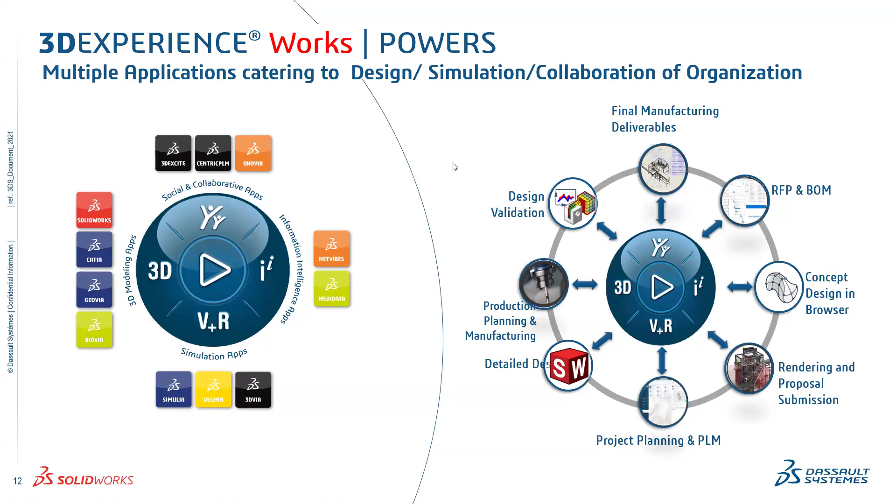So for all these, we have a single platform wherein we have all these solutions on a single unified platform. So over to Divakar to give you more details on our solutions.

Yeah. Thank you, Arun. Mute, please. Yeah. Thank you, Arun, for the wonderful introduction.

So, to take the journey forward, I would like to reiterate a couple of challenges which Arun has specified, right? When we are working, probably these are a couple of challenges in your current work environment. I am sure that you can correlate easily with a couple of them, if not all. Let's say when you started your design journey in your company, the designs were different. And today, with the demand, modular design is something which your customers may be asking for, or product complexity might have gone very high.

Data security, it's one of the areas where everybody is looking. I have the complete data. I have my own property of this data. So how do I manage this data? Then, as Arun highlighted, information is in silos. The design team knows what's happening, but how about the management? How about the marketing? Are they aware what is happening inside the company, what is happening in the design team and so on?

And with COVID in place, we saw that every customer was looking for team mobility. Can I work from home, work from a different plant as such? Then coming to digital communication, even today I would say many of our confidential data we are sharing through WhatsApp or something. Is there any better way of organized digital communication? Then data management, of course we will talk about how SolidWorks is going to help you.

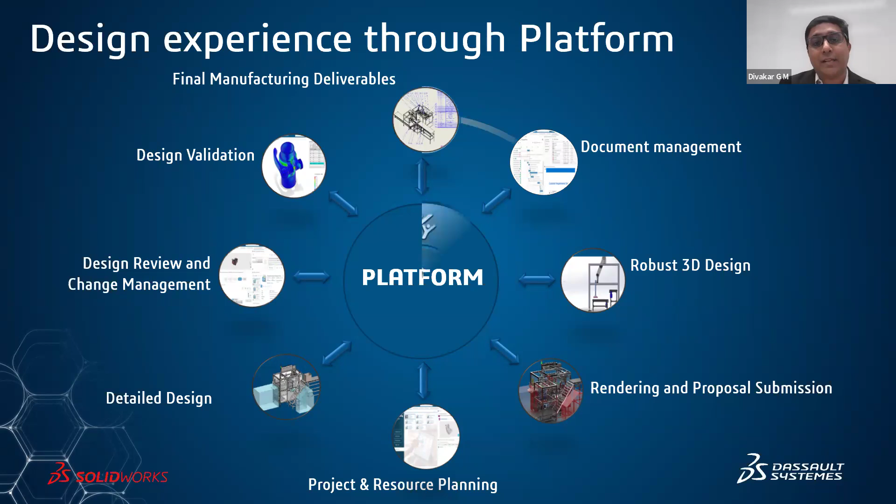In a similar fashion, since the technology has improved, can we have a platform even for this design organization? And yes, that's what we are going to showcase today, which is nothing but our 3D Experience platform. So what we are going to take you through in the next 25-30 minutes, what I'm going to showcase in my demonstration is, when you look at 3D Experience SolidWorks, the latest SolidWorks per se, the design and engineering portion is definitely taken care of.

You already know that SolidWorks is well known for its robust 3D CAD modeling system. Along with that, the governance or data management portion is inbuilt. Then anything on simulation is also there in the same platform. So basically what we are going to showcase today are connected products in a unified platform, which will definitely result in a collaborative work environment.

How is this possible? When we say the latest SolidWorks, which is 3D Experience SolidWorks, of course the design tool SolidWorks is there. On top of it, when you procure SolidWorks or upgrade your existing SolidWorks to the latest SolidWorks, the data and task management is inbuilt. You heard it right. You are not going to procure one more software to manage your data. Instead, in SolidWorks itself, you will be able to manage your data, whether it's revision management, version management, or task management. It is already inbuilt within the SolidWorks interface. In the next couple of minutes, you will see a demonstration on that as well.

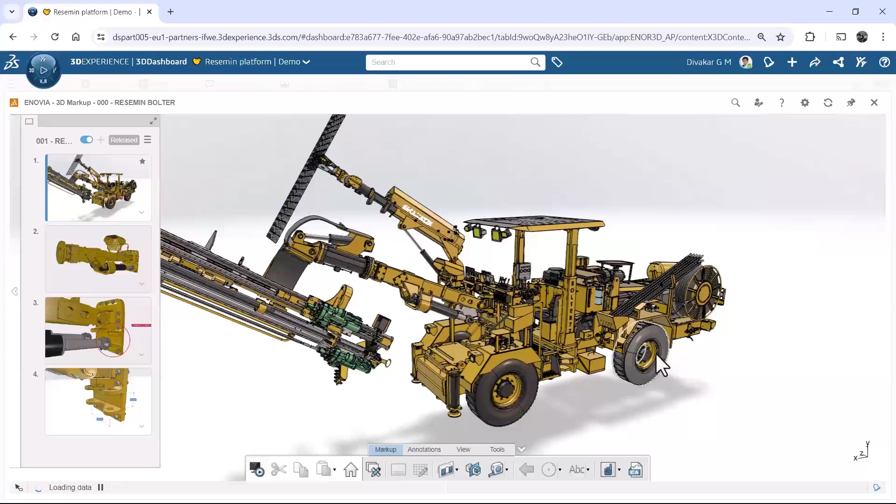Now, the design head opens the task and he sees that instead of going by emails or text, he can literally go by these kinds of markups, which can be created even by a sales leader, a marketing team, or the service guy as well. So he understands that, yes, this is the machine I'm supposed to work on. In this subassembly there is a requirement; for example, in this case, I'm planning to do a design of a knucklehead assembly. So how this needs to be done was communicated pictorially to the design head.

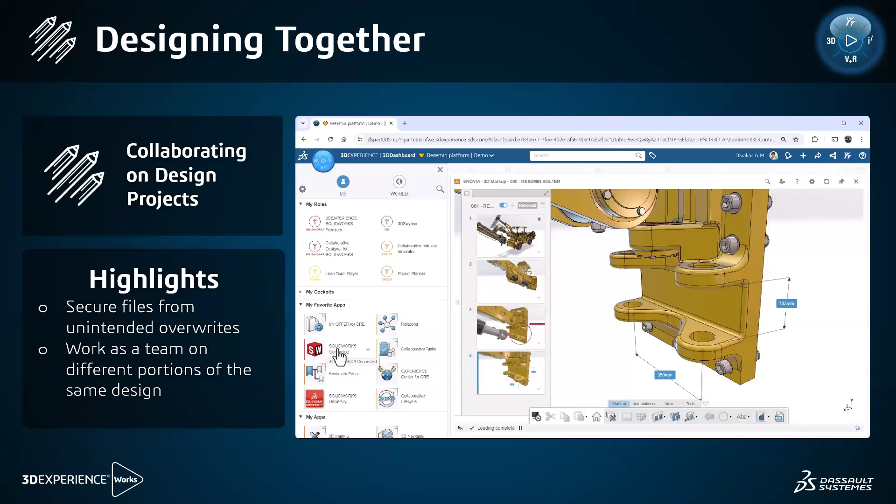Now, coming to the design head, let's see how he can start his journey. First, he will just log in. He will launch SolidWorks from the platform. He knows this is the assembly and the details, so he will open up the assembly. Yes, this is where the assembly needs to be done. The first thing he'll do is start creating a part. For example, this is the knuckle part. I'm not getting into how this can be created. So he has already created the part.

Now you will see how SolidWorks will help you. The data management is already coming into the picture. As you can see on the right pane, with a click of a button, I'm entering into the platform area, that too within the SolidWorks interface itself. So when I save this component, you see that earlier it was empty. Now you have all the relevant areas like revision, maturity state, all that information automatically generated.

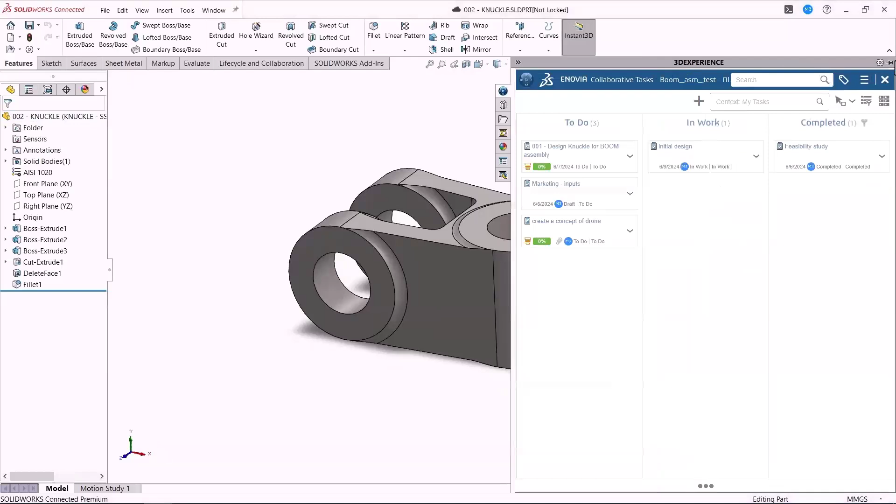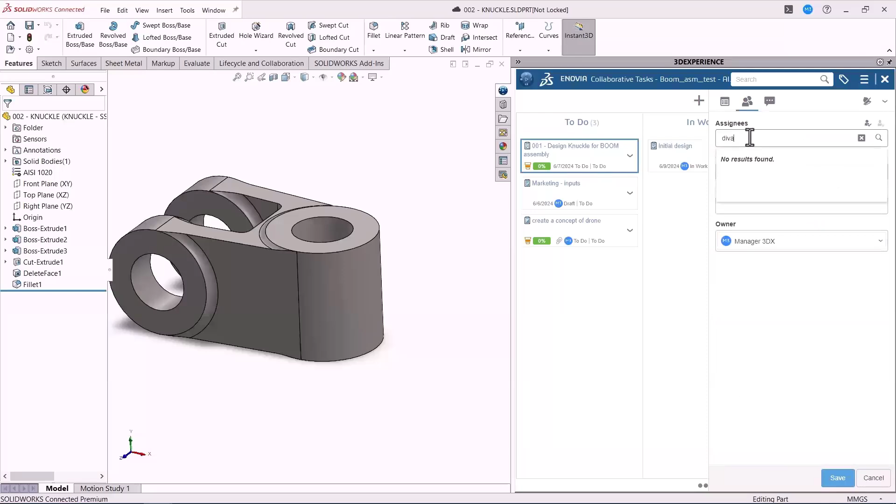Now, as a next step, I have created this component. Now I want to push this to my design engineer, asking him to build a complete assembly out of this knucklehead, which will be fitted into that particular boom assembly. Instead of telling my engineer to go to this folder and pick up these components, I've started creating a task, and in the task itself I have added the links to those components. Then finally, I'll assign this to my engineer, stating this is the component you're supposed to work on, this is the assembly you're supposed to work on, and so on.

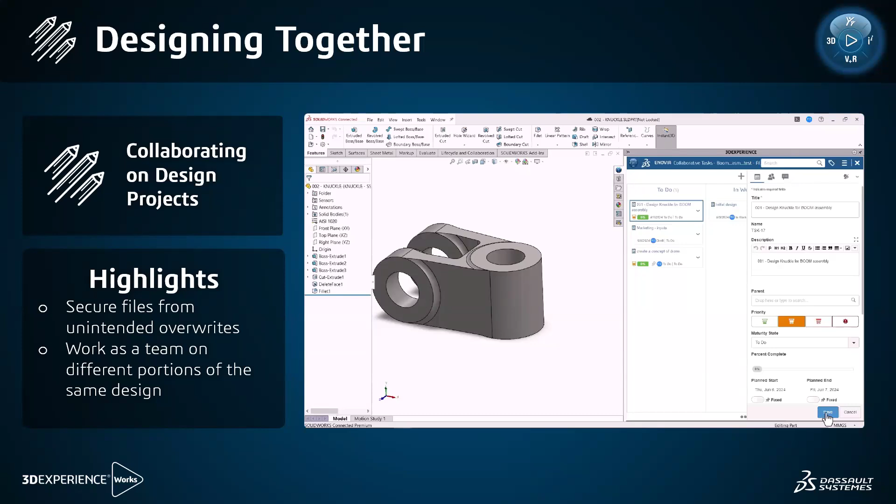So what you have seen is from the traditional to the latest way of working, where instead of simple email communication with words, you are seeing everything pictorially, and that too with the right data. So that's how the communication, or the collaboration, has started happening.

Now let's come back to robust design, how this can be done. Many of you would have already seen in one way or another how SolidWorks works. Let me show how the latest SolidWorks will help you be much more productive, along with the built-in data management which I talked about. As you can see, this is the SolidWorks interface, no change at all, right? With a click of a button, the platform is coming into the picture.

Now the designer has opened his task. He understands these are the tasks his manager has assigned. He has picked up the priority task. The manager has told him to use this data and so on.

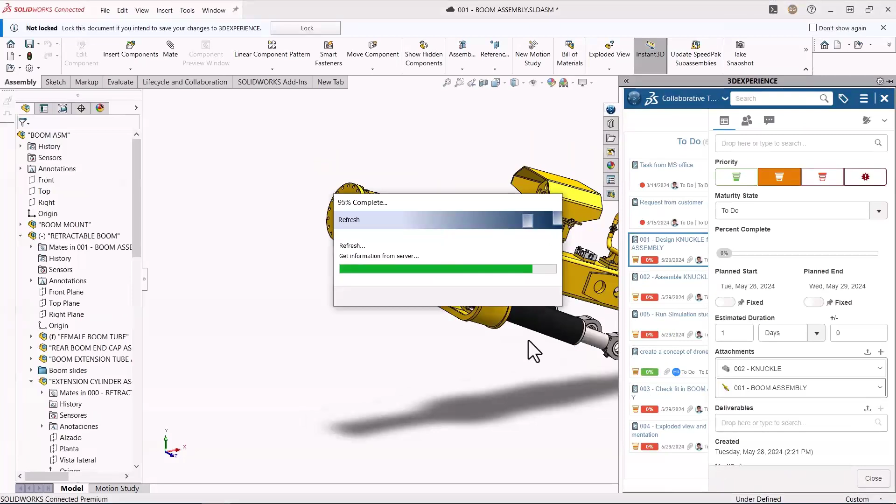So whatever manager has assigned, he has seen that and he simply drags and drops. Literally, he has to simply drag and drop. No need of searching the data also. From the task, he has dragged and dropped the assembly, and the assembly opens up in the SolidWorks interface itself. So he understands, yes, this is where I'm supposed to build the knuckle assembly.

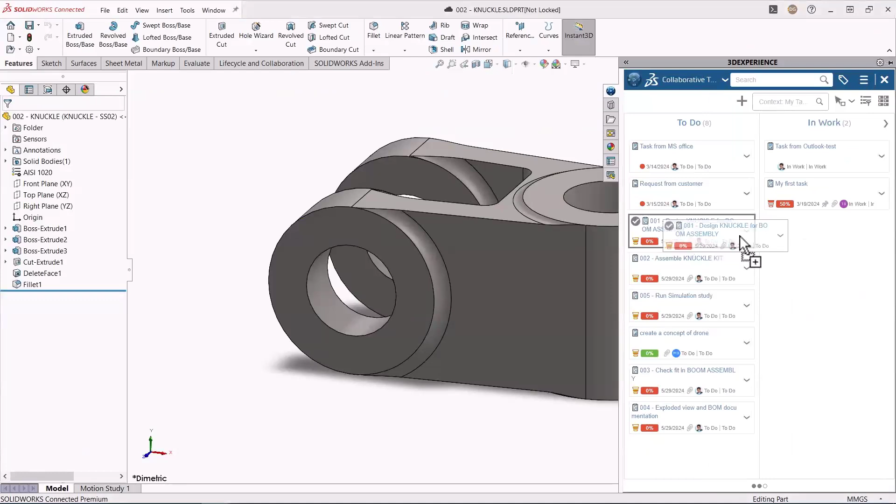Now the design head has also attached the knuckle component. He'll open that as well, and then he will start the journey using SolidWorks. Since he has already started working towards it, he'll move the task to in-work so that his manager is also communicated that the engineer has started working on it.

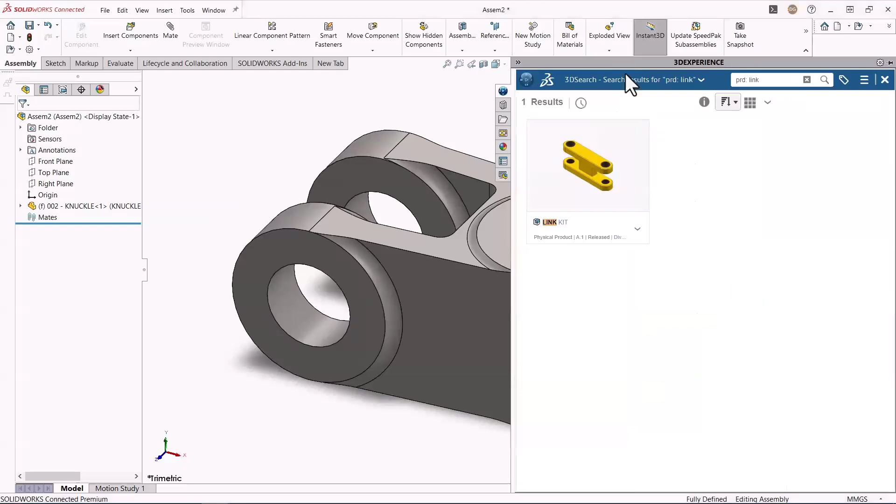Now, a couple of basics of SolidWorks. You can start directly from part, creating the assembly and so on. The differences I'll try to showcase, what benefit you can get. Now, the designer understands that there is a bearing he is supposed to assemble. Instead of creating a bearing, he remembers in his previous project there was a link kit where the bearing he used fits exactly into this assembly as well.

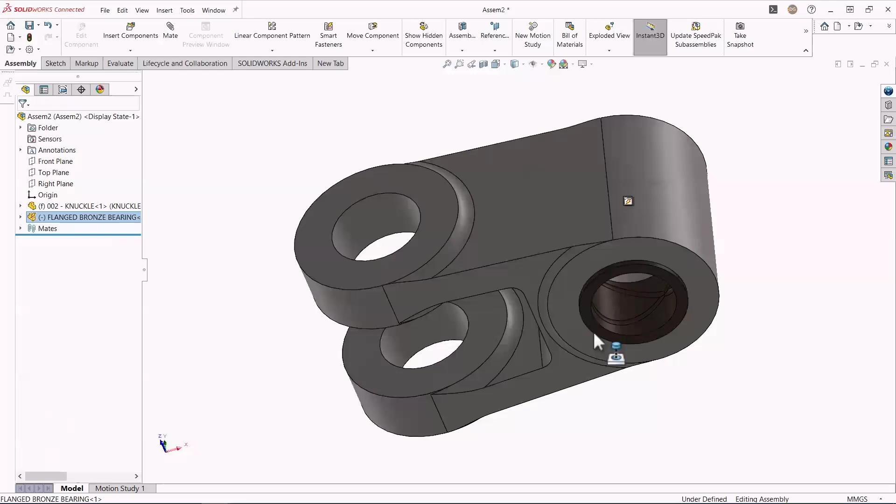So even without knowing the number of that, he will simply search for that assembly. He will see the parent-child. He understands this is the bearing he's supposed to assemble, and simply drags and drops, and he was able to assemble it seamlessly, just like a simple drag and drop.

Now, you know that SolidWorks also helps you with smart components. That means for any component you have assembled, any cutouts that need to be created, all those things can be taken care of. Now the cutout has already been created in the knuckle component as well. Now the next thought is we have created the drawing, so that cutout information we are supposed to pull into the drawing. So we will update with the sectional view.

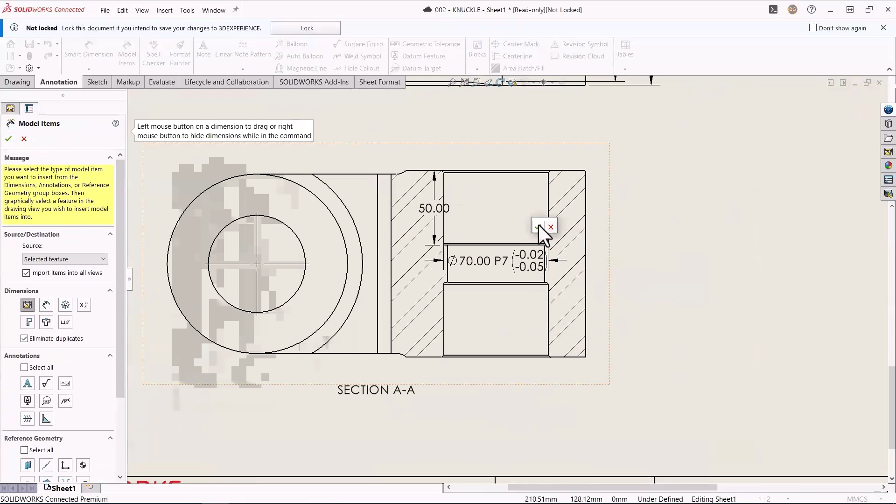Directly we pull it and we see that the cutout information from the bearing has already been transferred to the component. We are talking about parametric drawing, so all the information is there. Then instead of creating the dimensions, we are again taking the help of the dimensions already utilized during the CAD model. From the CAD model, you are pulling the dimension data as well, and seamlessly you can auto align the dimensions. And in this way, you will be able to complete the drawing.

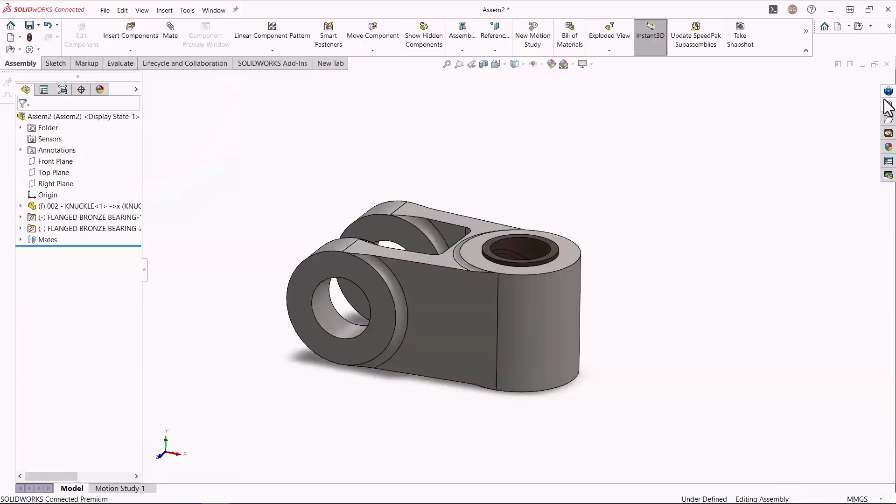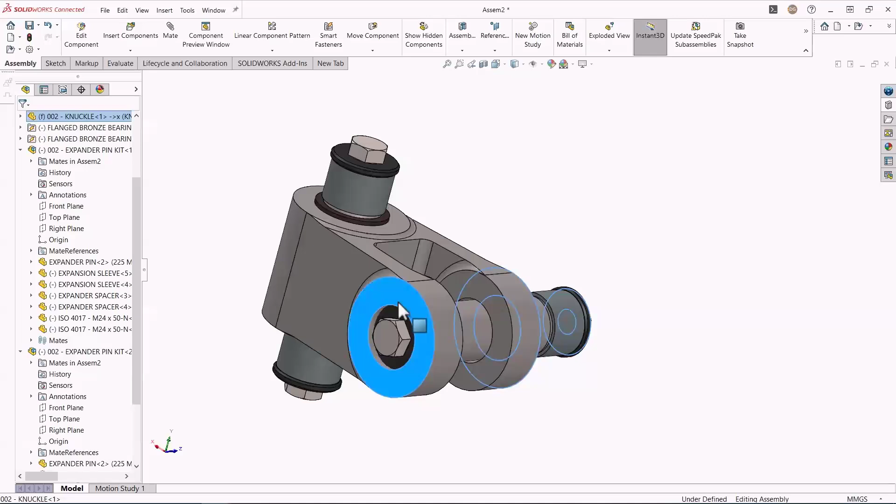Now let's move to the next journey, wherein I would like to assign a few more components. Let's talk about design library. In SolidWorks, you have the design library where you can build your own custom library as well. For example, this expander pin I have bought, just dragged and dropped into the assembly, and I was able to assemble. Not only that, with the latest SolidWorks, there are many more assembly features which will help you to assemble. For example, what I'm showcasing is the width mate. Just pick 4 faces randomly and automatically it will align itself to the middle.

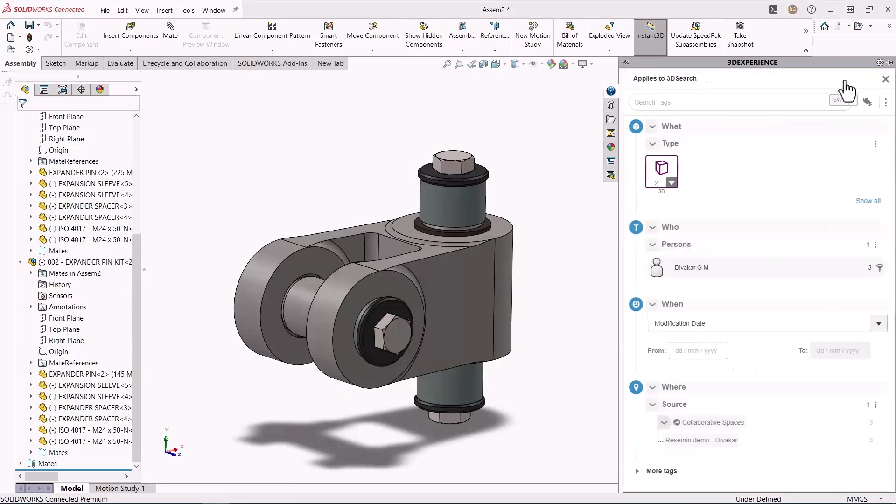Then another best thing, the configurations. If you are using them, you can go to the configurations. Instead of 220 length, I want 150. I was able to do that seamlessly as well. Now, another best thing you can see here is, I remember I'm supposed to use a wear plate in this assembly. When I search for it, I don't know the number, but I'll search by the name. I can also filter just like Amazon or any other platform. You can search by filters also.

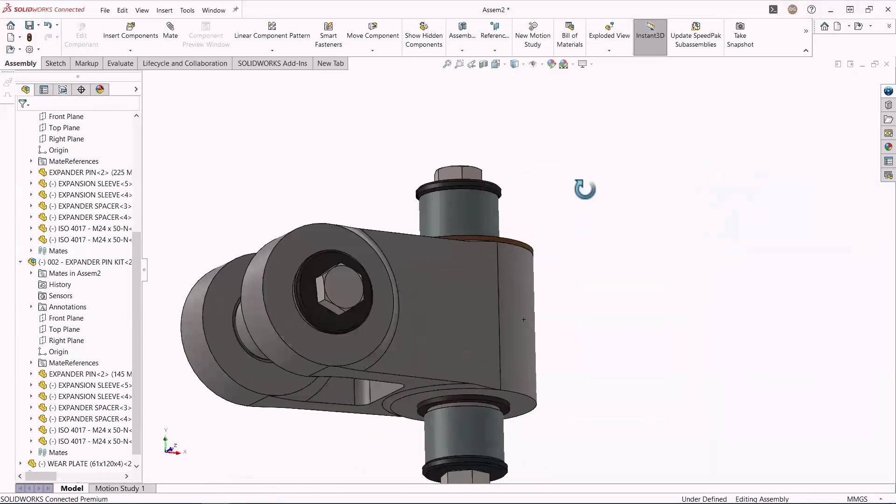So now I am filtering the wear plate, where the initial results were 3. I wanted to bring it down to the wear plate which is a bought-out component. So I pick that property and you are able to do that. Then simply drag and drop and again assemble it. So what you saw in the previous section was you are seamlessly utilizing SolidWorks and all its benefits. Along with that, we were able to utilize the components, seamlessly search, and many more things.

Now, let's understand that this is the new assembly. So I need to check this in first. As soon as I say save it to the platform, I can give the number. In this case, let me give the name Knuckle Kit, the new assembly. Now I am going to save it to one particular bookmark. As soon as I save it, this is visible to my manager as well. He doesn't have to follow up.

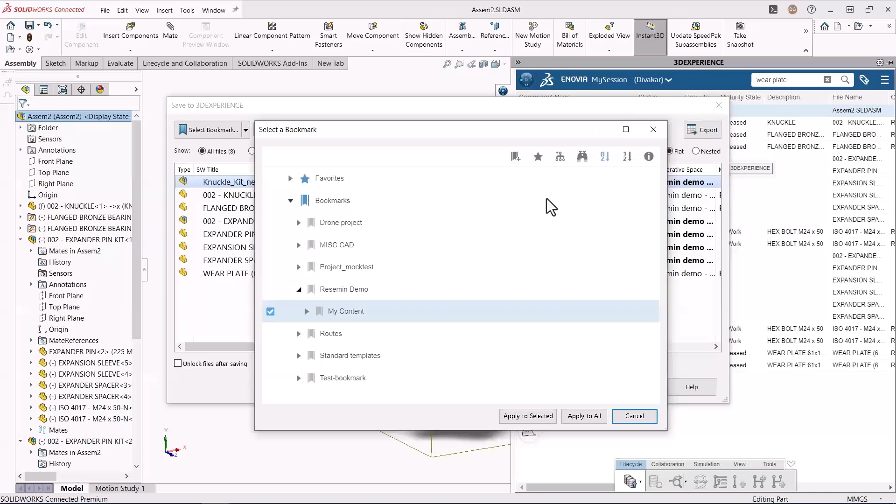Instead, he will also come to know that this component has been already done and so on. So the data is already shared with my manager as well. So let me save this.

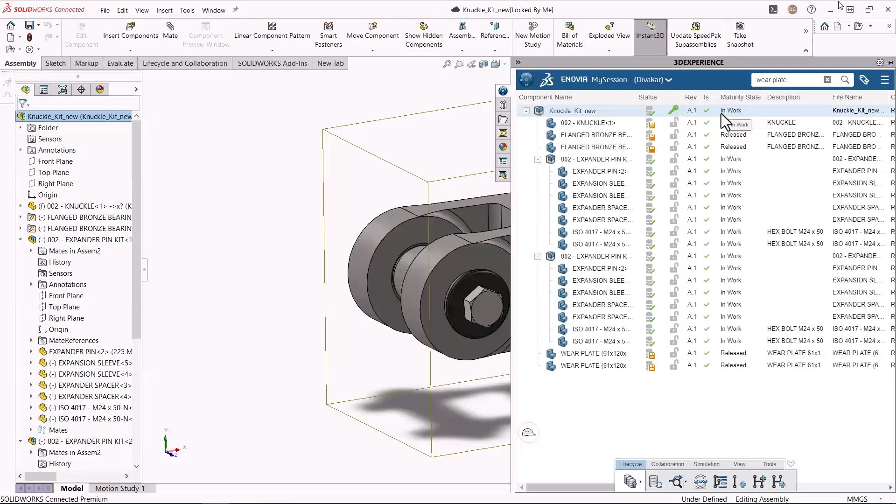Now, what you are seeing here is as soon as I save it, you will also see that the revision, the maturity, all those things are coming up automatically. So this is the inbuilt data management which I'm talking about. Seamlessly, it is taking the information of revision, A1 is there, maturity is in work, and all the related information is passed on to the platform itself.

Now, this is my last section on the CAD model where I'll try to showcase what else you can expect when it comes to SolidWorks benefit. Very quickly, I'll try to showcase. So coming to data management, now this top assembly is already released. Since it's released, per industry best practices, we have to bump up the revision, right? So from A1, I'm going to increase this to B1.

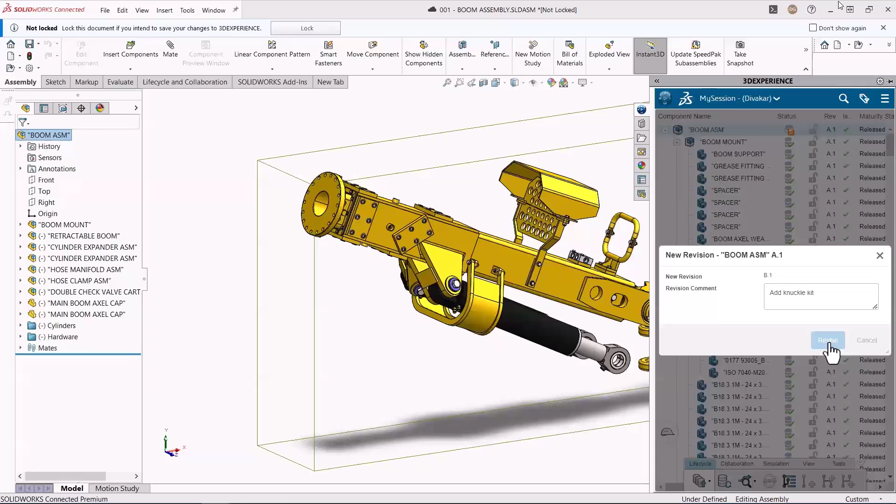And seamlessly within the SolidWorks interface, I'll right click and say I want to revise this. The B1 revision is already taken, and automatically the maturity state changes from released to in work, and the lock key suggests that you have all the rights to work on this assembly.

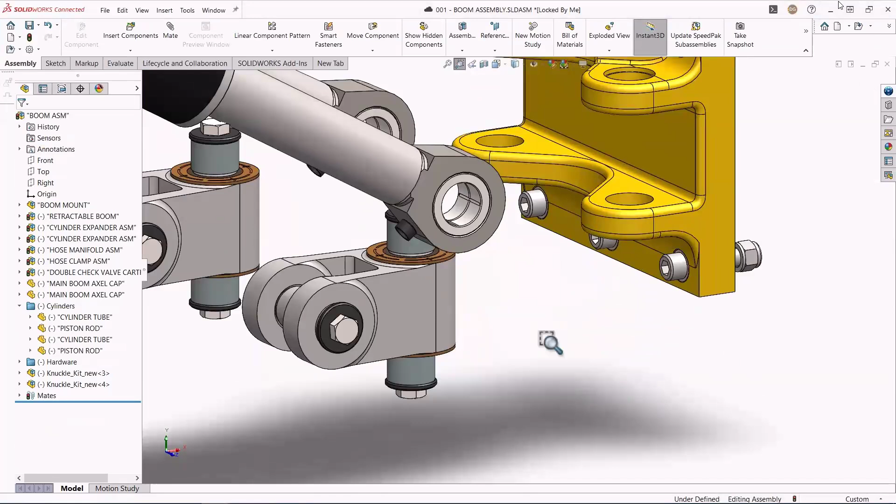So as you have been noticing, everything is visual. It's a visual treat when it comes to the latest SolidWorks. Just by the symbols, you can understand what is the state of this component, what is the state of the assembly, and so on.

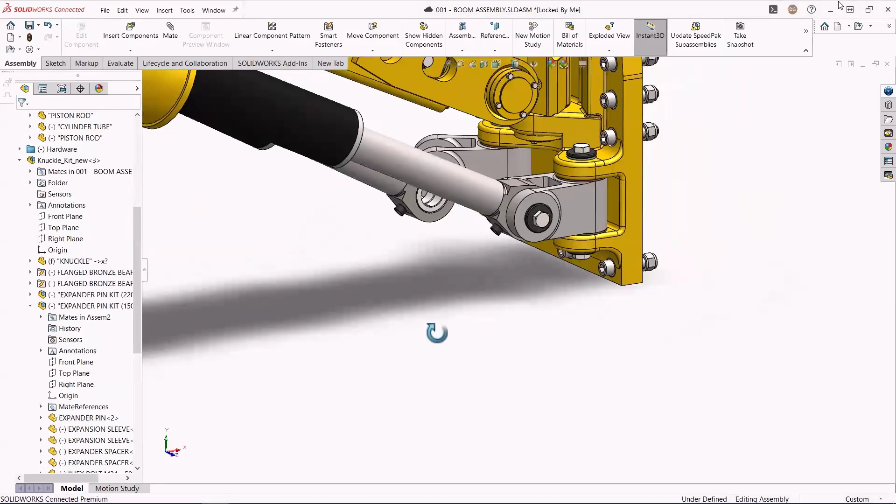Now I'm trying to assemble all these things just like your loved SolidWorks, no change. Simply use all these magnetic assembly features as well. SolidWorks also puts at your fingertips what possible options are there when it comes to assembly as soon as you pick surfaces and so on. Now, let's say we have completed this assembly, everything looks good.

Now, moving forward, one more feature I would like to showcase. For example, let's say I would like to check interference, collision detection. You have that option also, where SolidWorks helps you create an interference check or collision detection. It also highlights where the detection is happening. As you can see, on two components the color change is happening. That means there is a collision happening.

So how do we rectify? The best way, in this case, is to increase the width of the cylinder guard to avoid the collision. But the practical problem is, if I change it, what will happen if it's already used in another assembly, right?

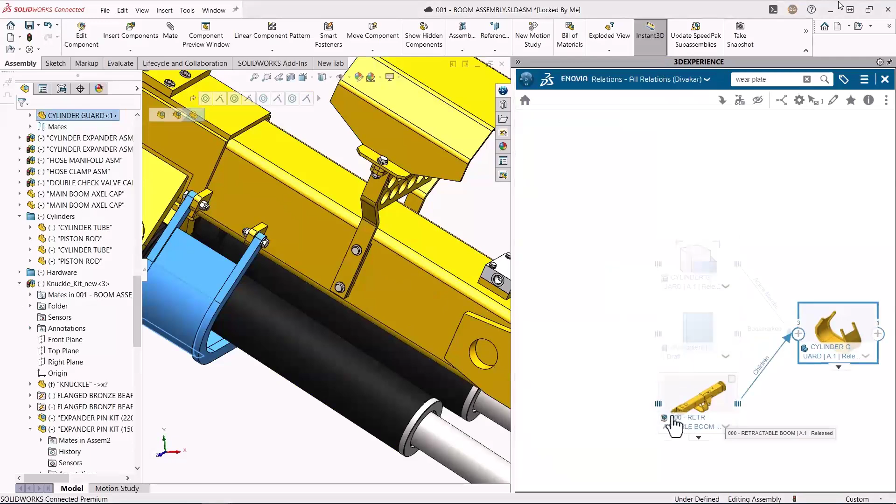For that, you have the relation application as well within the SolidWorks interface itself. You can simply drag and drop it into the relation application, and you will see where this particular component has been used. As you can see graphically, it's been used in three different assemblies. Any changes in this are going to affect those assemblies as well. And let's say in this case, we are fine with that.

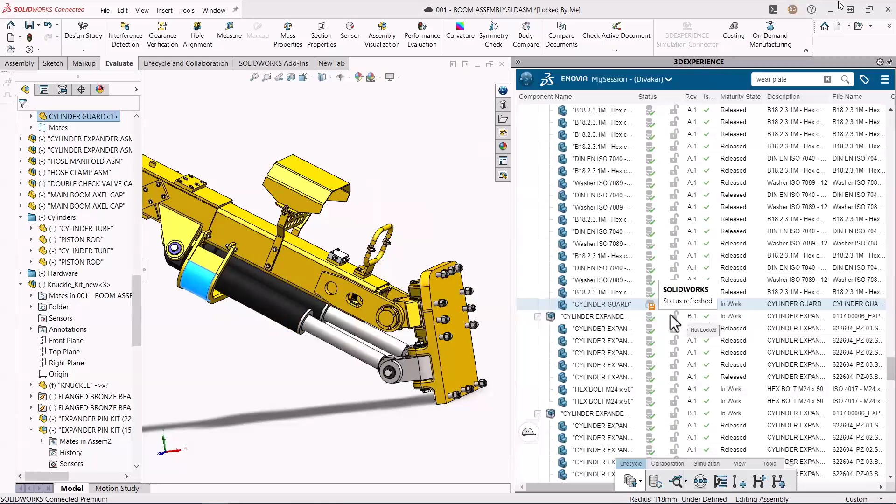So the next thing is, since the cylinder guard is released, I'm going to revise this once again because the changes need to be done, right? So we will change it to the next revision, which is B1. And you see that the lock suggests that you can work on top of it, as it's in work, so that you can edit it. The next step is pretty easy. Just change the dimensions and see if this modification is good enough to avoid this collision.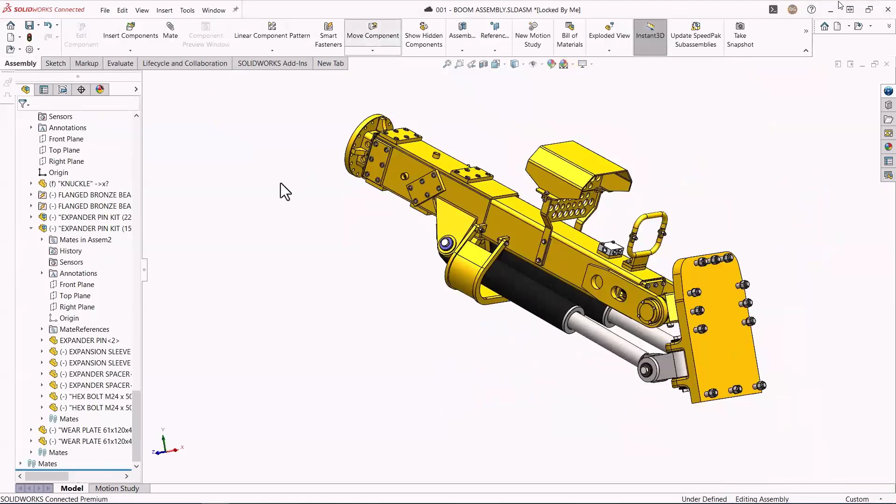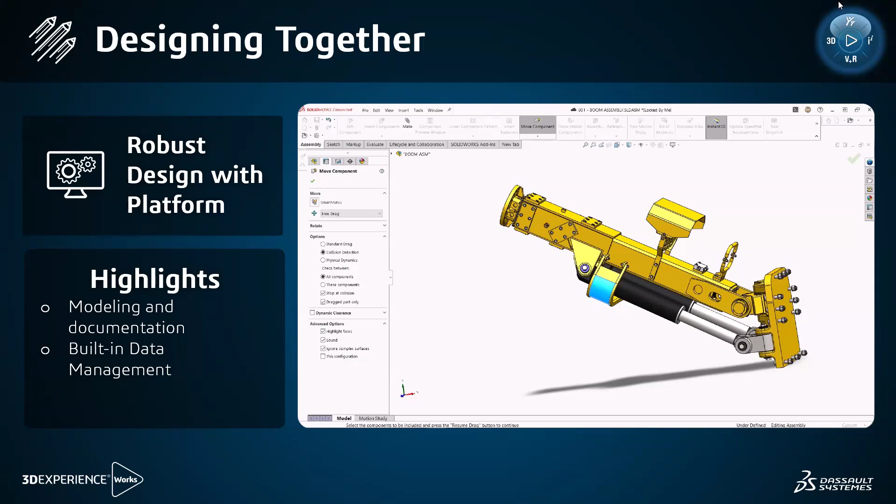So basically what I wanted to showcase is, instead of going into various areas, within SolidWorks itself you are seamlessly able to utilize your own design library, simply drag and drop. You are able to search for components which you have used in previous projects. You are able to check where this component has been used with where-used options. Everything is there along with revision management. You are able to do revision and version management as well.

Let's move on to the next section. Now, I mentioned that there will be a dedicated tenant for you as a customer. Only you and your team members who have access can access it, not even Dassault, not even your reseller. But the thing is, how secure is my data?

Everybody wants to secure their data, and yes, we do care for that. As you can see, we have all the relevant certifications, all the cloud security certifications, whether it's ISO 27001 or any other certification. We have all the relevant certifications for this cloud security, and we do have all the white papers which can be shared with you as well.

Another aspect I would like to showcase is data security. Today, if you are not utilizing cloud security, you can probably control security in two sections only: the internet layer and the physical security layer. That's about it. But with the help of the 3D Experience platform, you are looking at a 5-layer security mechanism.

The internet layer is there, the cloud layer of security is there, as well as applications. You saw that along with SolidWorks, I have seamlessly started using different widgets and applications as well, so you can manage who can utilize what kind of applications. So you have application-level security safety also. Along with that, virtual system layer and physical security layer are also a possibility.

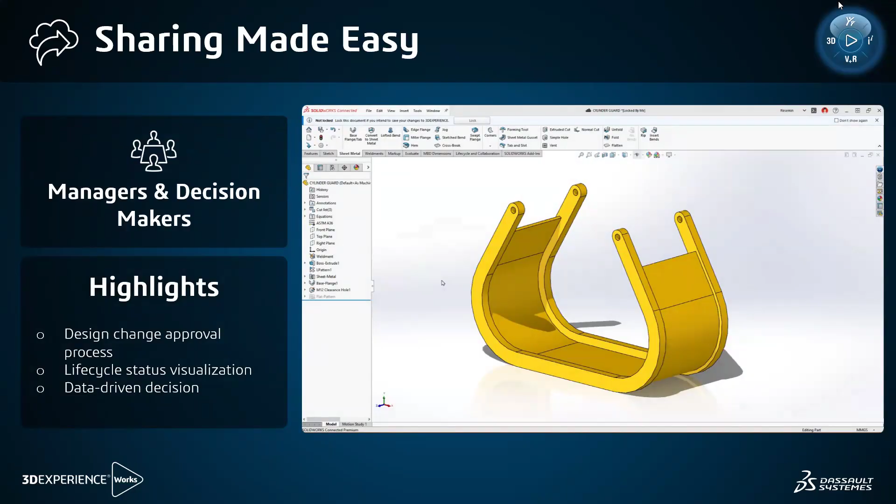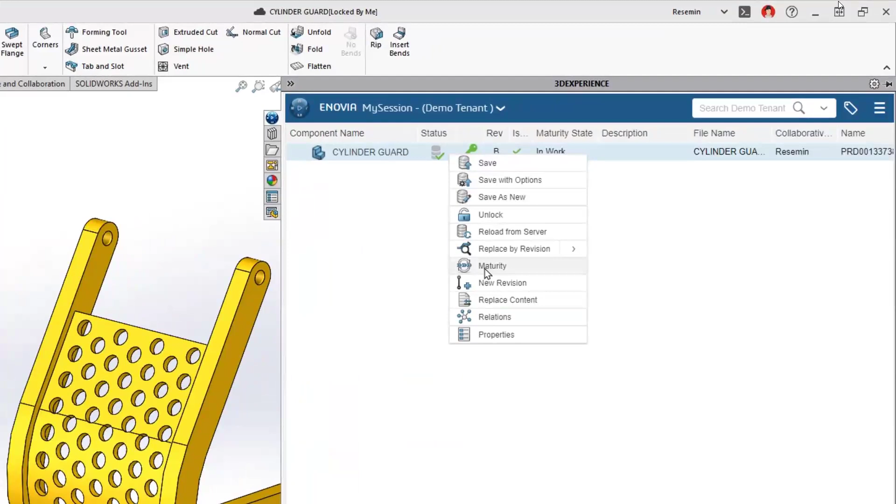For example, in this case, the designer wants to work on top of it, so he will first lock it so he can work. The modification I've already created with these perforated holes and all. As you can see, I would like to save it. Since the lock key is there, the green mark suggests I can only work on top of it. Once I'm done, I feel this is ready for quality check.

So the next best option is we move this status to the frozen stage. That gives the indication that my manager can look at it and do the quality check, or QC. Now, instead of getting inside SolidWorks, let's say the manager doesn't have SolidWorks, but he would still like to review and release this data. He can do that seamlessly over a web browser.

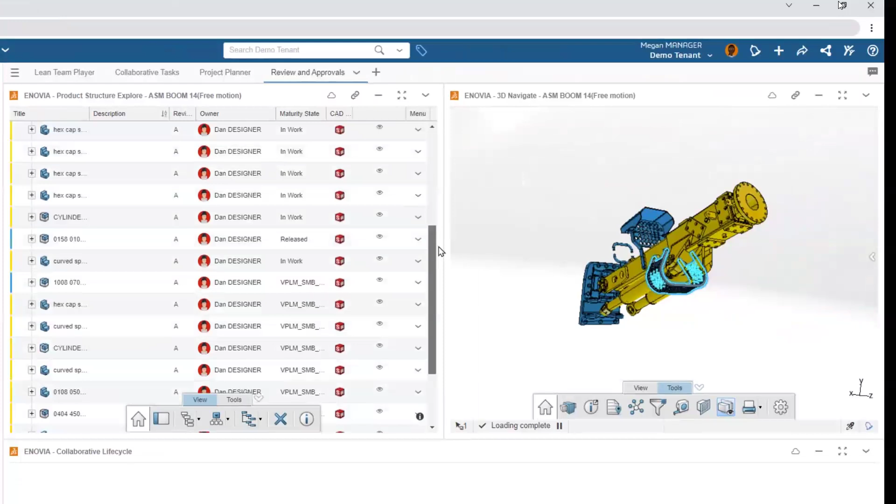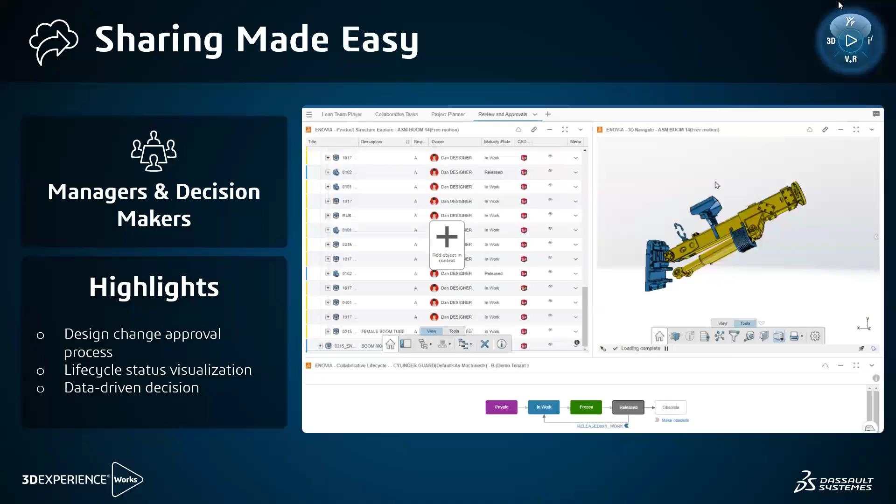He will simply look for the assembly and can visually see, as you are seeing here, what the components are—everything is visual. Then he will open the same application inside a web browser as well, and seamlessly change the maturity to the release condition. So that's one portion of it.

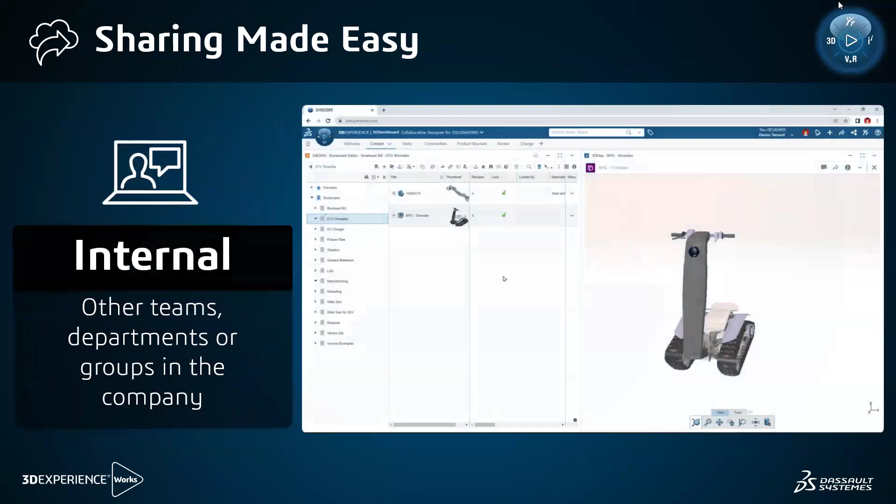But how about other collaborators, internal or external? Let's target first the internal team, let's say the marketing team, for example. You have already built the component. How can we utilize this for the marketing team?

The easiest way is you can drag and drop this into a particular folder where marketing has access. These are the folder structures. This particular top assembly, I would like to give access to my marketing team, granting all the relevant information and access.

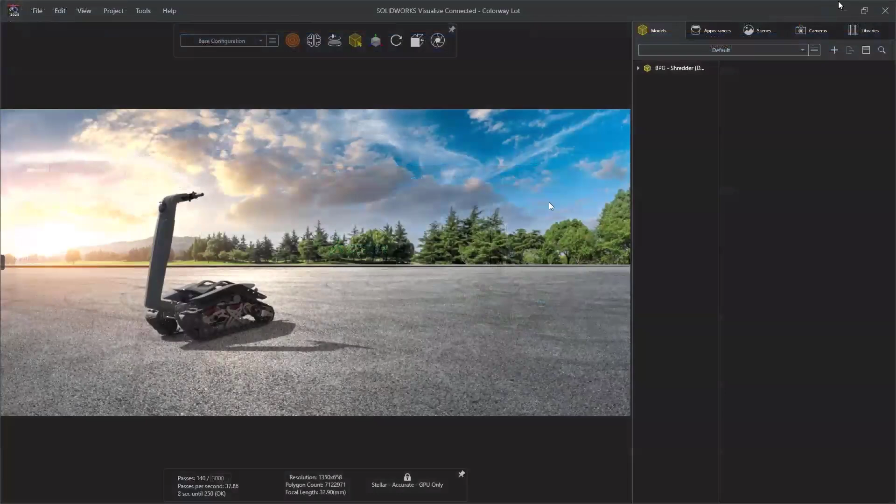Now, as the marketing team enters the same platform, they will see in this particular folder, yes, this is the component I'm supposed to do some rendering on. So they will take that, seamlessly open SolidWorks Visualize, and start working on rendering the component. I'm not getting into how it's done in detail.

The gist is you can easily collaborate with your cross-functional teams as well—marketing team, sales team, and so on. They will be able to utilize the same 3D CAD model, which is the single source of truth, to build photo-rendered images and create stunning wow factors whenever you present to your customers. Now let's look at how external suppliers and vendors can be communicated with, or how you can share it with them.

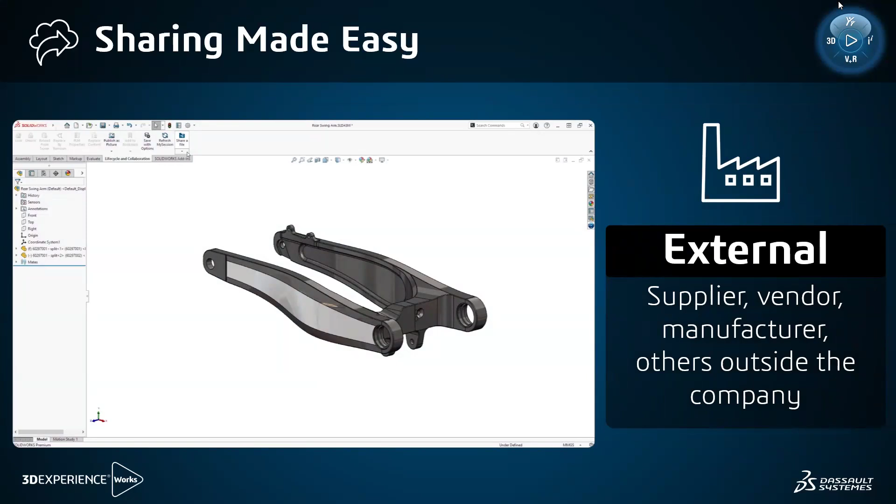The good news is, even if your suppliers or vendors today are not using SolidWorks, they will still be able to access this data and work with it. Let me show how. In SolidWorks, there's an option called share a file, where you can activate sharing with external members. Let's say I'd like to share it with a particular supplier and another person from the vendor. I can share that data to that particular vendor or external people as well.

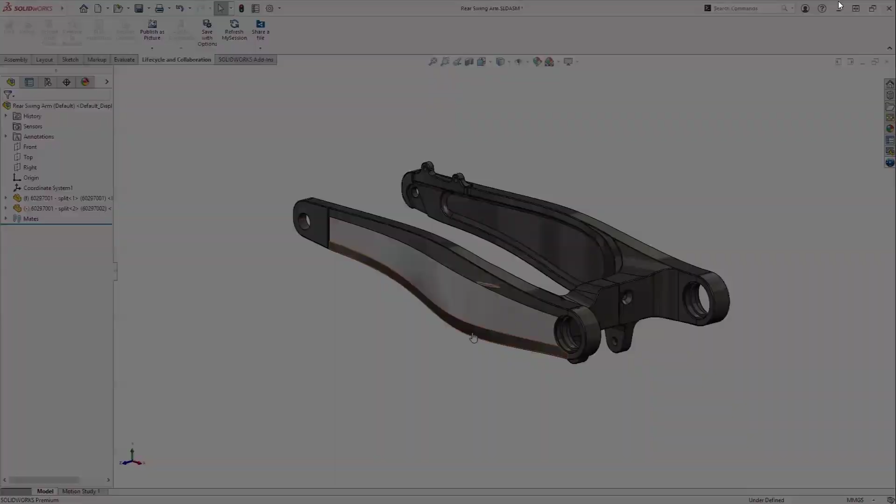As soon as you click share, they will get a notification through email, and only with that email will they be able to access this data. So everything is secured. They will open this particular component in a web browser, still without having SolidWorks installed. They'll be able to open it over a web browser, see the details, and start communicating. So collaboration is now happening over a web browser.

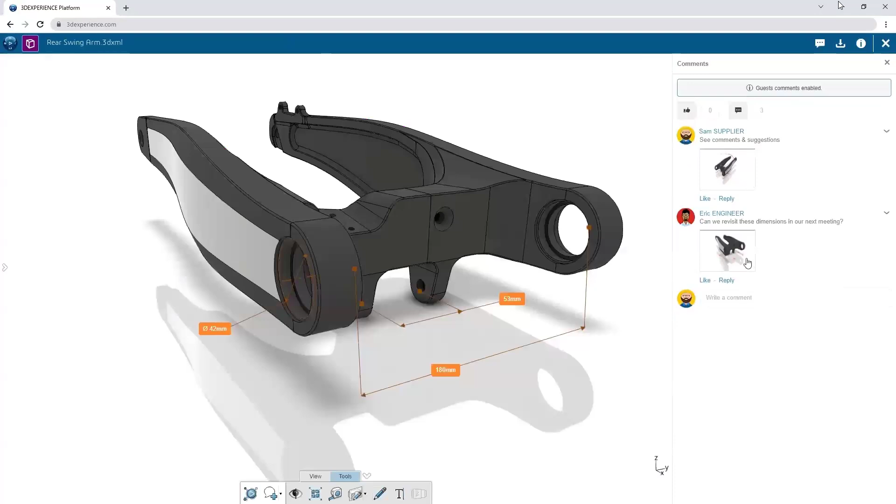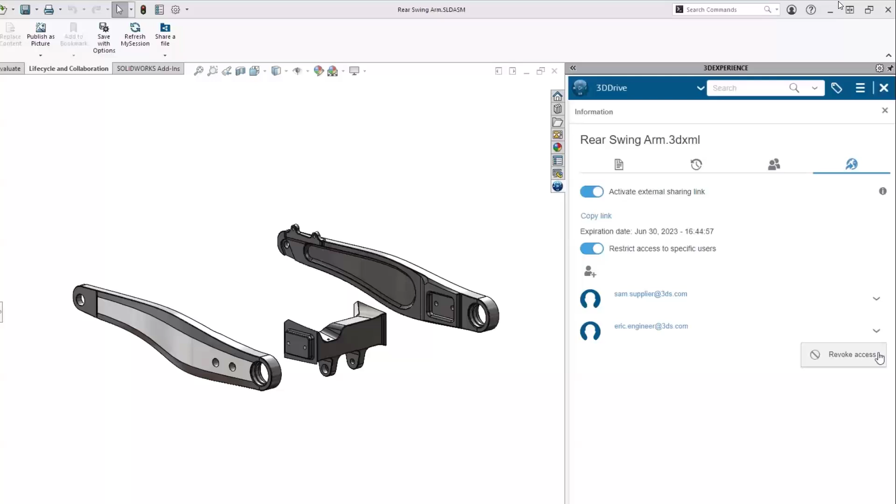They have all the options to explore the assembly components and so on. Markup is done, assembly, explosion, measuring - all those benefits are also available over a web browser. Just like any other networking software, such as Facebook, they'll be able to perform markup, share, comment, like, and all those things are possible. As soon as they share the data back, you'll be able to pick that up and do the relevant modification, communicating using the web browser itself.

So this is the next level of communication you're seeing with your vendor and supplier, even before starting detailed designing. These kinds of communications are a possibility.

Now we saw how design can be done and how collaboration can work together. Let's talk about scalability. What does scalability mean to you? As we discussed, changing headcounts - as you can see, these are already on the platform and these are all out-of-the-box solutions. So you don't have to worry about how, if you add a few more people, these things can be adopted. It's no problem at all. You can easily adopt, your team can easily adopt to that as well.

Now let's focus on two other areas: working with other departments, and how the new technology can be scalable. This may involve the manager, the simulation team, or the marketing team. Let me show how management can access this design data, without having SolidWorks installed in their system - you heard it right. Without SolidWorks, over a web browser, your management can access and control the design data and all the relevant documents as well.

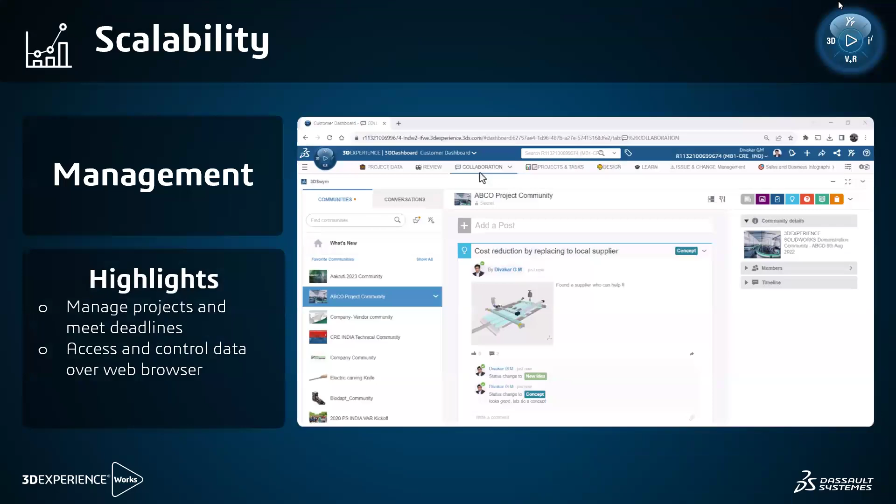Let me show how you'll be able to manage and control your projects. For example, there's a widget where you can have these tasks. I already showcased how tasks can be managed inside SolidWorks. Now I'm showing that the same task widget is available over a web browser as well, where tasks can easily be added.

You add the task, describe it, and as the project progresses, you can change the percentage of completion, end date, start date, and attachments. Previously I showed how you can attach a component inside SolidWorks. Now, over a web browser, I'll simply search for the particular component that needs to be worked on - it may be a specification sheet, a document, or a CAD model. I'll attach all the relevant components and information in the same task.

Then I'll assign this to my engineer, and you also have collaborative tools where you can chat, give likes, comments, and so on. Taking it to the next level - how projects can be managed.

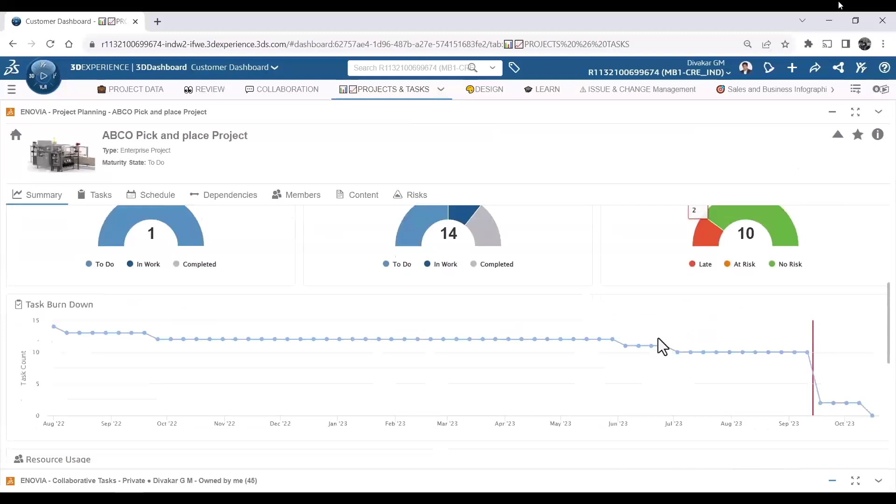Of course, the live dashboard is there. What you're seeing is not a static image, it's a live dashboard. As your engineers move the data toward completion, the data is updated here. Not only that, the same tasks you've created can be seen in a Gantt chart as well, with multiple tasks visible.

You can visualize tasks through a Gantt chart, and there's task dependency you can create as well. As your engineers change the percentage of completion, you can visually see that reflected in this particular widget too.

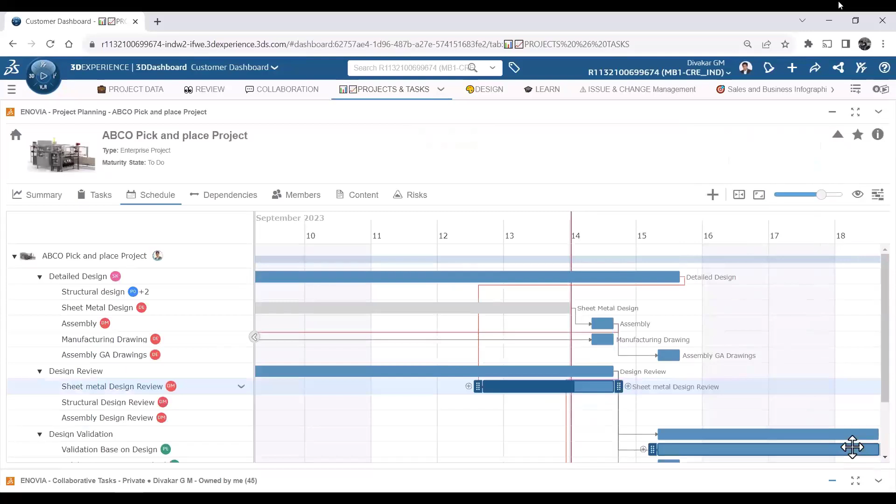That will give you the complete picture of what the project is and how it's going. No need to connect with your engineer individually to understand what's happening. Everything is visual—you'll understand how the project is progressing, how many tasks are completed, and what the next level of action is. You can take informed decisions with the help of these tools.

Now let's take it to the next level where you are a design head or R&D head. You don't have SolidWorks, but still you want to review. I already showed how you can review. Let's see how maturity or revision can be handled from the web page itself.

So without SolidWorks, you again enter the platform area where you'll see the same widgets, where your engineers have saved the data. As soon as they save the data in these particular folders, it becomes visible to you—whether it's SolidWorks data, DXF data, or simulation data.

Along with that, as you saw earlier, once I save the data to the platform, revision and maturity become automatic. That data is also visible to you, along with information on whether you're looking at the latest revision or an older one.

You'll also notice this red lock suggests that one of your engineers is still working on this particular document. Now we understand this cross mark means I'm looking at older data.

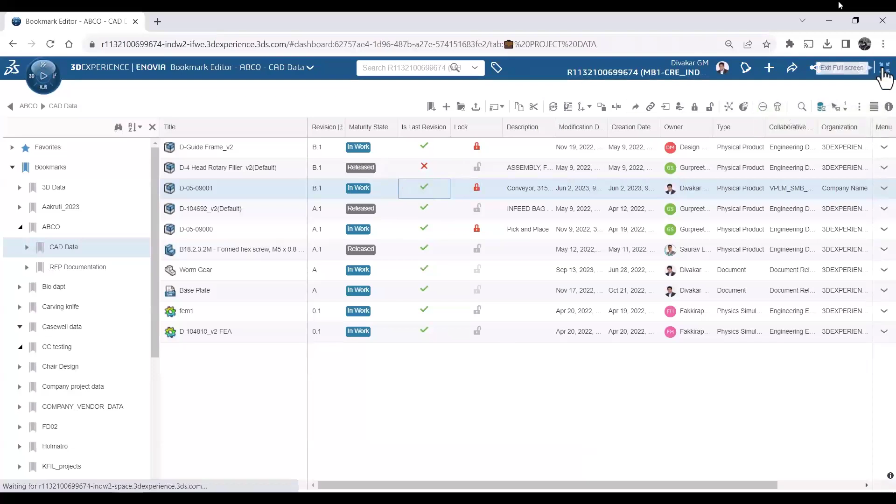As an organization, it's not only CAD data—even documents need to be managed, like ISO documentation. It's all about managing your data, whether it's a PDF file, document, or presentation. Just like CAD, you can manage non-CAD data too, with revision and maturity all handled over here.

Now let me show an example of how you can release or change the maturity of this particular component. The same widget you open in SolidWorks can also be accessed through a web browser. This component is in work condition—I'd like to move it to the frozen stage. With a click of a button, it moves to the frozen stage.

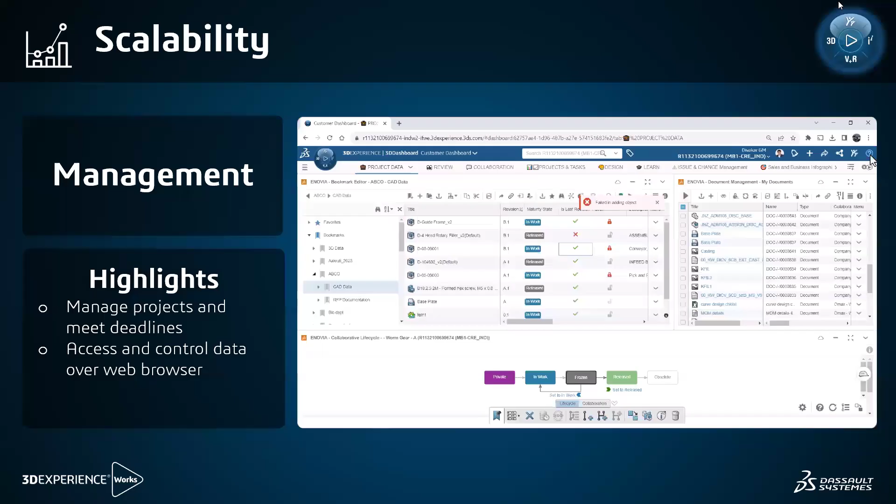If you want to release it, you can release it, or if you want to come back to in-work status, you always have the choice to decide what the next step is for that particular document.

So that's one way this scales to management as well. The same platform benefits can extend to management too. Let's understand how it can be taken to the marketing team.

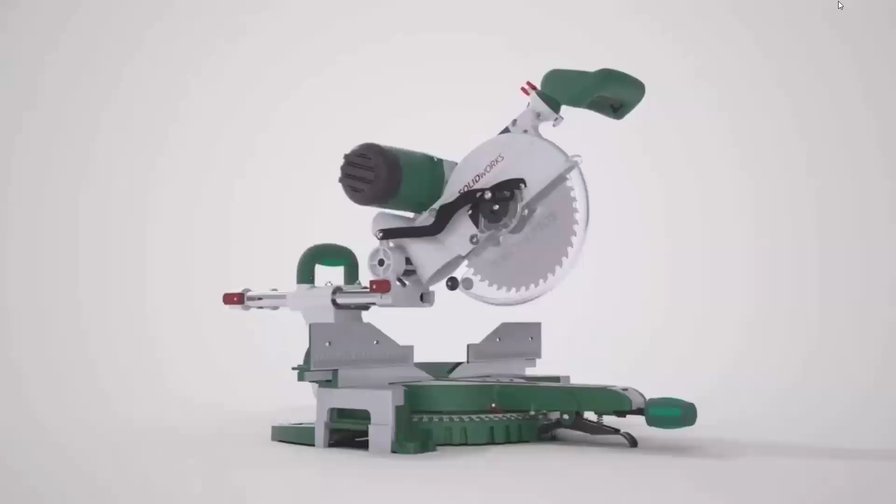As we saw earlier, you drag and drop into a particular folder—for example, this cutter—and I'd like to visualize it using Visualize, creating photo-rendered images. This Visualize tool comes as part of SolidWorks Professional and Premium, so you're not purchasing it separately; it's already there with you.

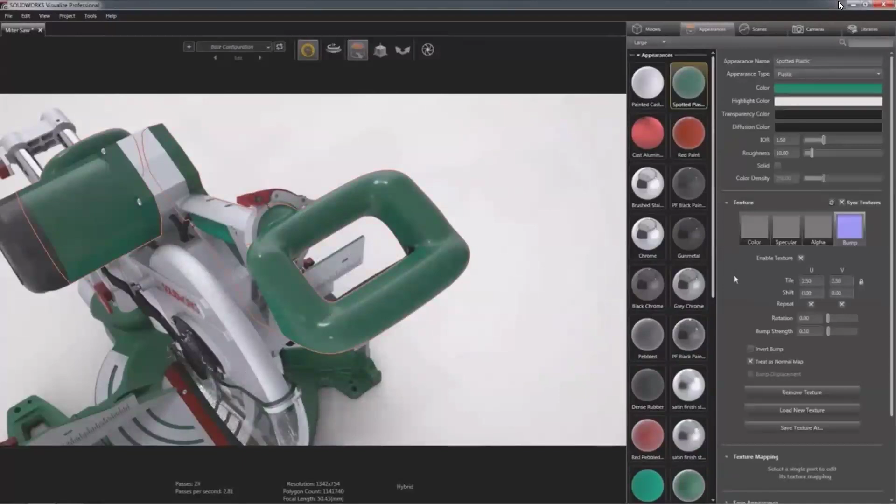The best part is all the relevant appearances—there's a huge library, whether it's metal, plastic, or transparent—all already built in. Not only that, even the appearances, like texture, you have complete control over.

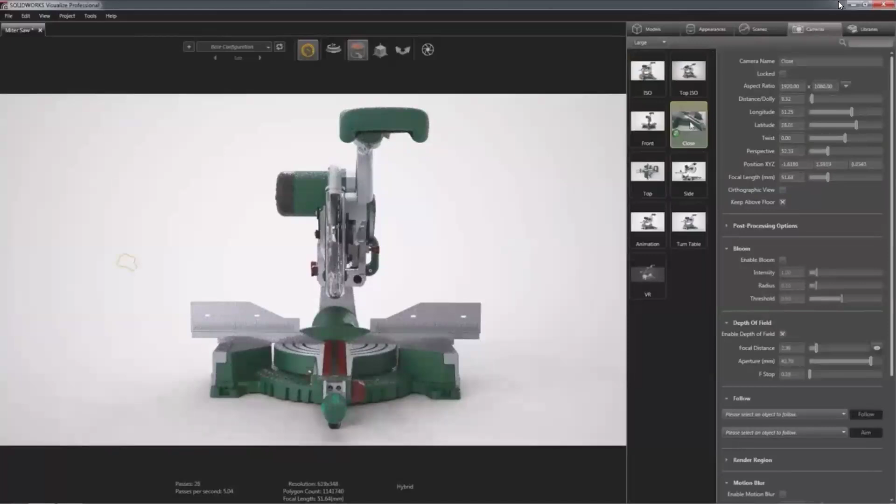So the point I'm trying to make is you can always create photorealistic renderings using your CAD data itself—even before you start your first prototype, you can create photo-rendered images without having the physical part. These are a couple of examples of how you can create photo-rendered images, and videos are also a possibility—you can scale to that as well.

Now, another interesting portion, and my last area on scalability, is how this can be adopted for new technology. As you grow, you need more and more access and control over your design.

The requirement will keep on changing. For example, nowadays we are all talking about design over a cloud platform or design over cloud, right? Are we ready for it? I'm going to showcase that. Of course, we are ready for it. Advanced CAD tools, which I'm talking about today, is a browser-based parametric tool. You heard it right. Your engineers are going to work over a web browser.

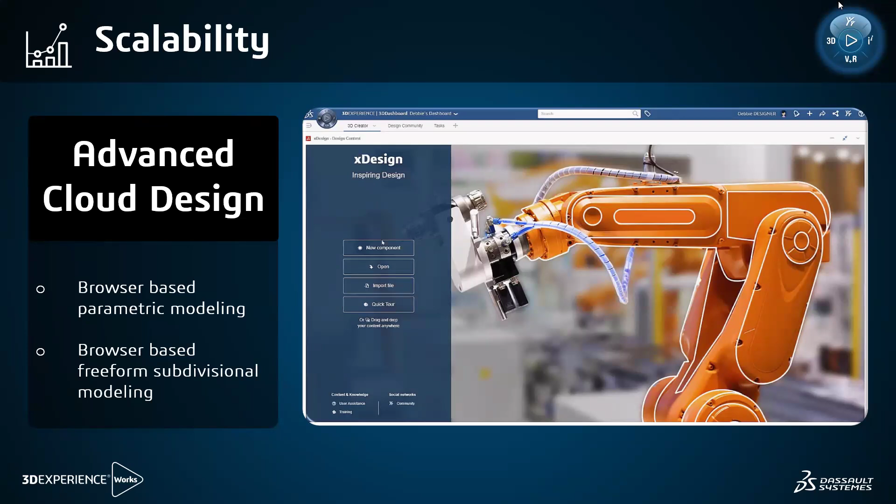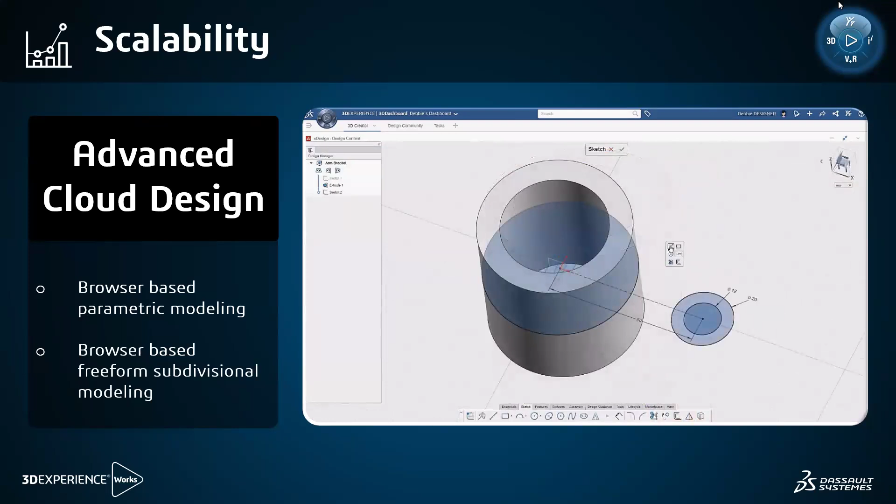If they are out in a field and they want to work on a concept, they don't have to scribble on a piece of paper. Instead, they can make use of any handheld device, maybe a tab or something. With an internet connection, they can start working on parametric design itself. As you can see on the screen, there is a web page. You log in and you have access to this. Literally no installation is required.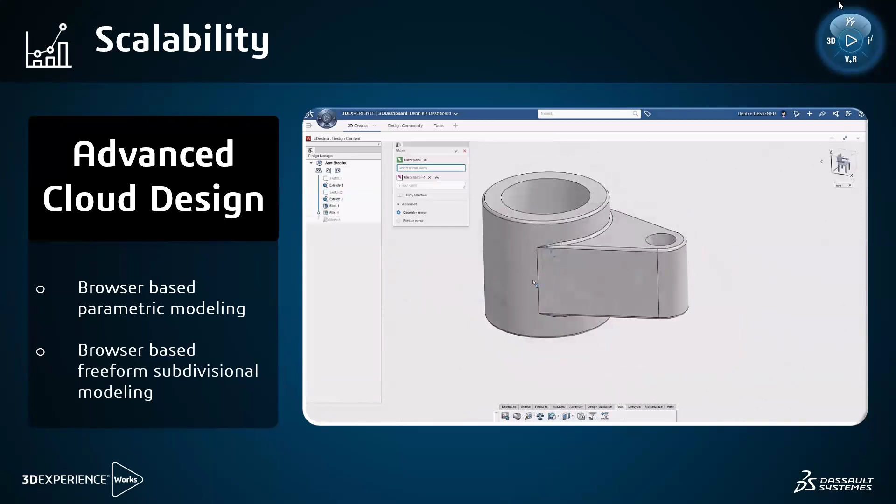Over a web browser, you can log in and start working on the parametric design you are looking at, wherein all the dimensions are there, features are there, and you can always work on your concept design seamlessly over a web browser as well. So this gives you enormous capability to be more productive whenever you are on field as well, right? You will be able to build the assemblies. You can check on the linkages and so on.

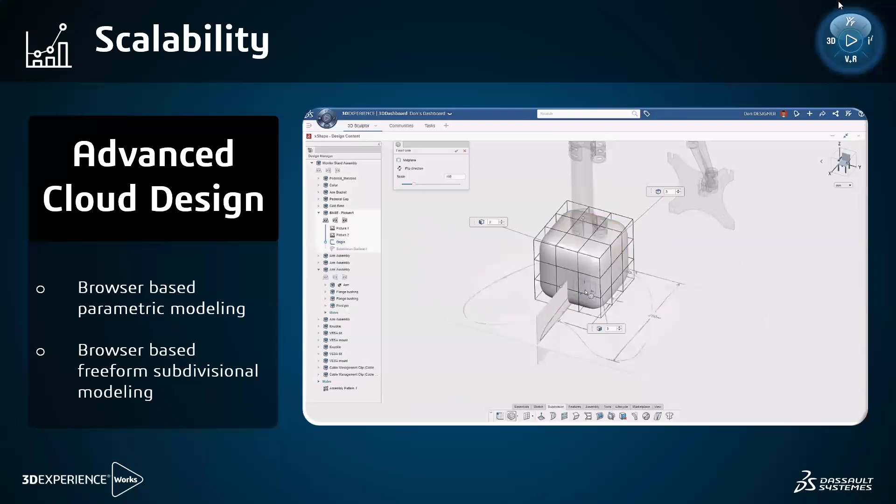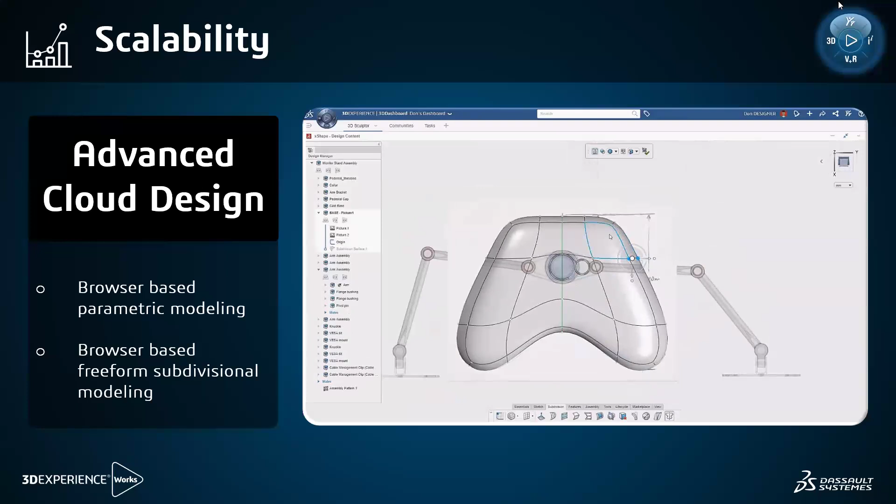So we are looking at the futuristic modeling capability. When you procure SolidWorks, it always comes with that. So you are pretty much ready for the future as well. Taking it to the next level, if you are into ergonomic modeling or some kind of clay modeling, surface modeling, you can think of this particular widget as well, where, as you can see, a push and pull mechanism is something you have to learn. That's it, right? So you will be able to create these kinds of surface modeling, clay modeling operations seamlessly, and work on top of it, and that too over a web browser.

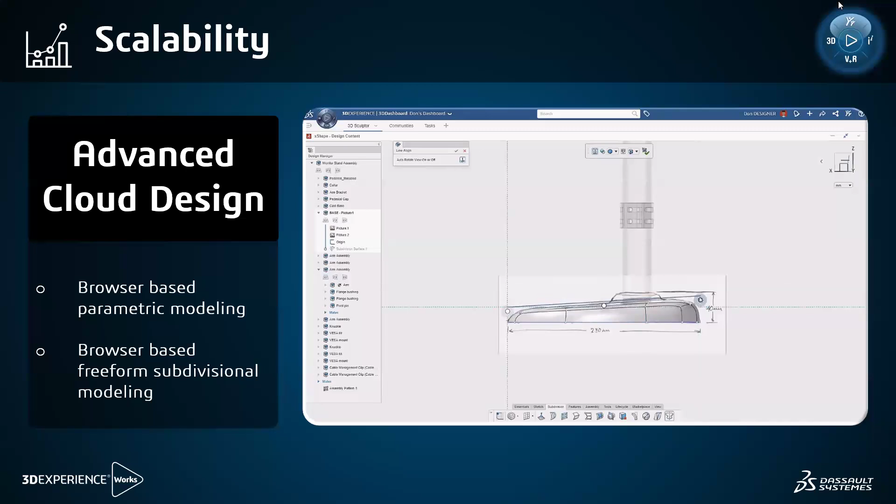And the great part of this is it can be checked for manufacturability also. Then for the same component which you have created, the interoperability is there. That means you don't have to convert this. You can simply directly open that inside SolidWorks, and vice versa. Whatever design you have done in SolidWorks, you can seamlessly bring into these cloud-based tools also. No conversion at all. The same CAD model you can bring to SolidWorks, and a SolidWorks model you can open in a web browser as well and start working on your assemblies and so on.

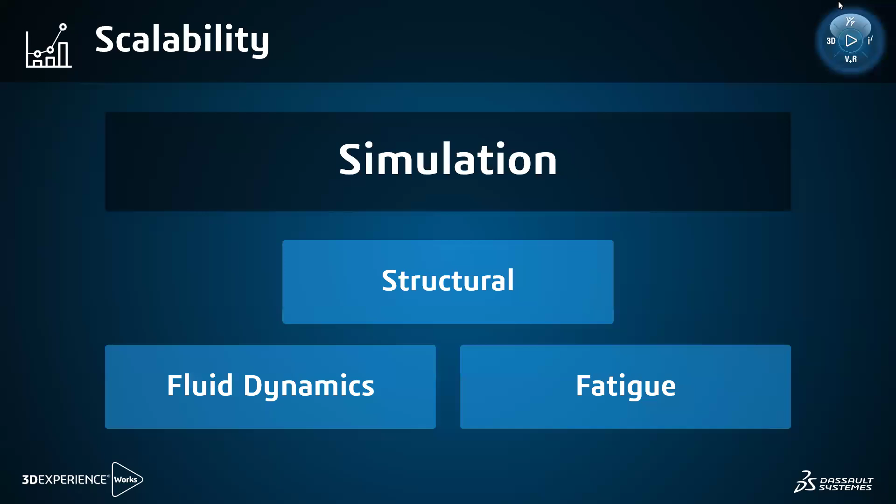Now, to the scalability portion. When it comes to simulation, today's need is you need to be first time right to the market, as well as faster to the market. One of the best ways of doing this is to simulate your product before it goes to the market, right? So we have all the right capabilities, starting from stress strain analysis till crash testing. As you are seeing, the structural analysis, whether it's a drop test or simple stress strain analysis, we have all the relevant applications in the same platform as well.

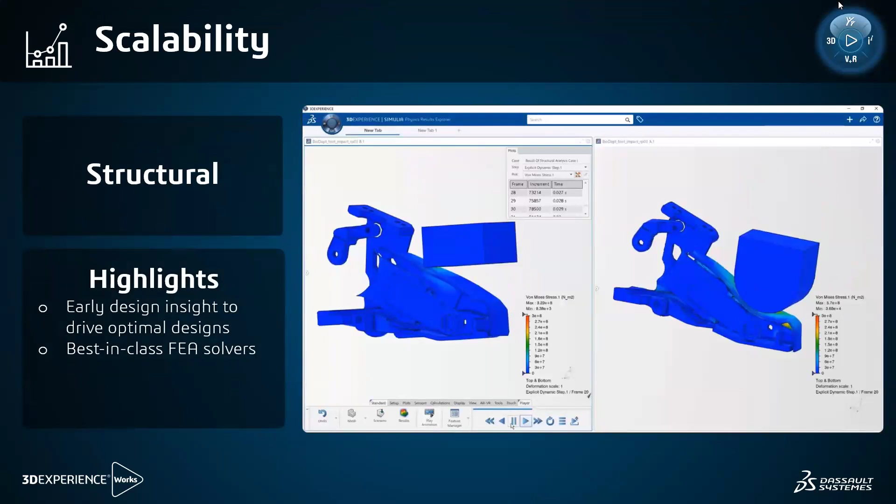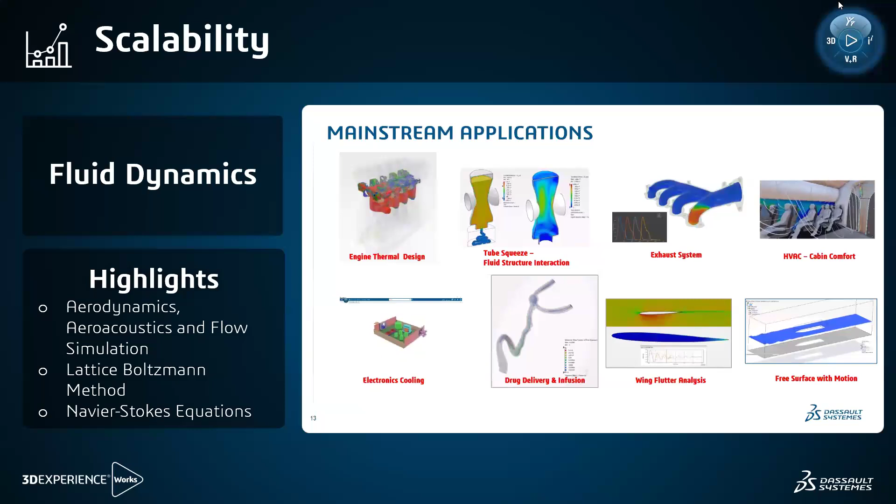That means no exchange of data. You don't have to worry about data losses, since you are dealing directly with the SolidWorks component itself. Literally no change, no data losses as well. Coming to fluid dynamics, we have all the relevant capabilities. I have put up a couple of example images so that you can think of the relevant areas. Any kind of fluid dynamics, we have all the fluid dynamics analysis also.

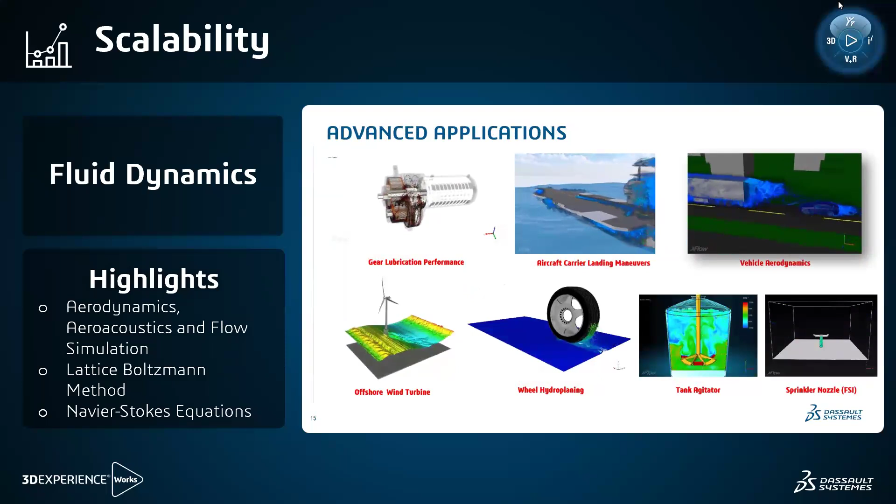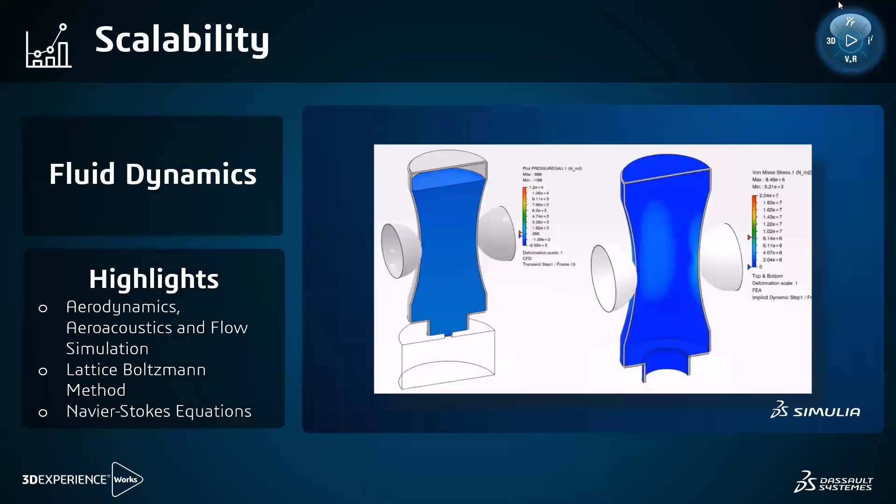And the great part is, if you are into analysis, you might know by now that Abaqus is the solver we are using. So we are talking about a great solver, which is well known in the industry, the Abaqus solver. You are utilizing the top notch product even for your SolidWorks simulation as well, right? So, as I said, we have all the relevant capability.

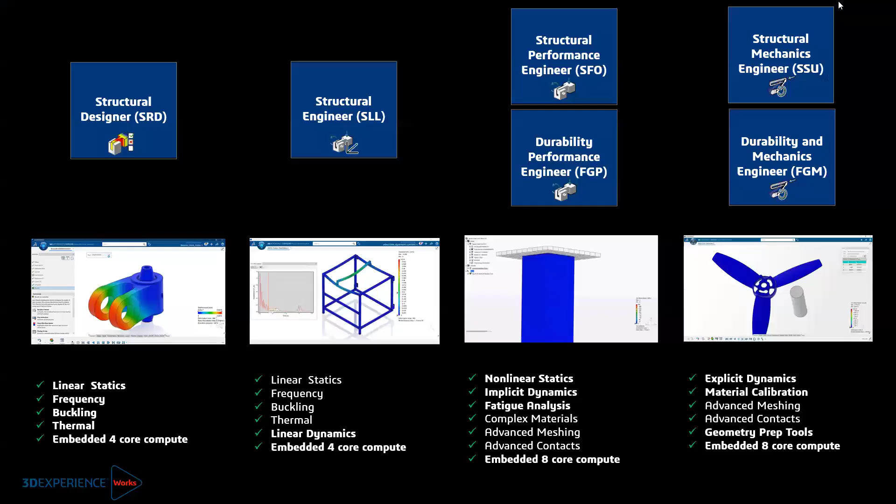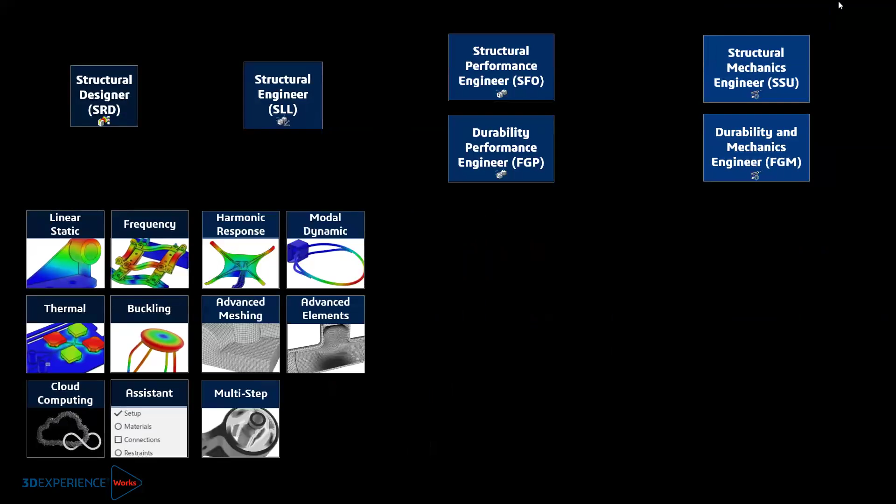Just to give a glimpse of what you can expect, you can think of a simple stress strain analysis till explicit dynamics also. We have all the relevant information. These are a couple of examples of what you can expect when it comes to the simulation portfolio. We have a huge portfolio which can help you analyze your data, whether it's implicit or explicit. We have all the relevant solutions when it comes to simulation, which is powered by Abaqus as well.

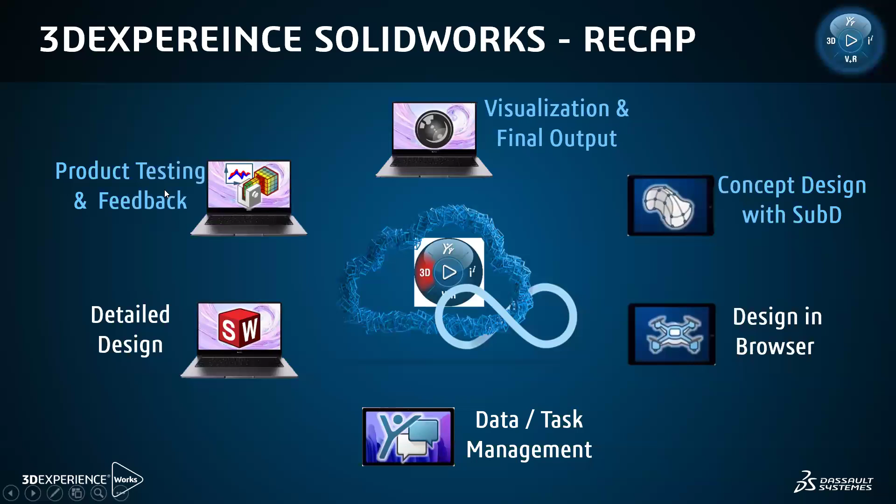So this is my last but one slide. I just wanted to recap. Whenever you procure the latest SolidWorks, you have SolidWorks with you. Data management and task management are inbuilt. Browser-based tools are also there. Visualize is a possibility; you can create photo-rendered images. Then product testing and simulation is also part of it.

So very quickly, if you ask me what are the key takeaways from this webinar, I would say these are the points. What you can expect from 3DEXPERIENCE SolidWorks, the latest SolidWorks, is that you will be entitled to a robust design solution. Data management is built in. That means you are not procuring another software to manage your data; whether it's a CAD document or a non-CAD document, you can manage those things seamlessly.

And I've also tried to showcase how collaboratively you can work, that too real-time collaboration. Whether you are a manager, with SolidWorks or without SolidWorks, having a login for the platform, you can take part even in the design activities. As management, I showed that you will be able to release the data and review the data without SolidWorks. So real-time collaboration is a possibility. We also talked about task management. All these things in totality help you take data-driven decisions.

And the best part is you are not dependent on a single computer. Anytime, anywhere, on any device, you will be able to access and control the data, which is your own data, right? So these are a couple of key takeaways I thought of highlighting.